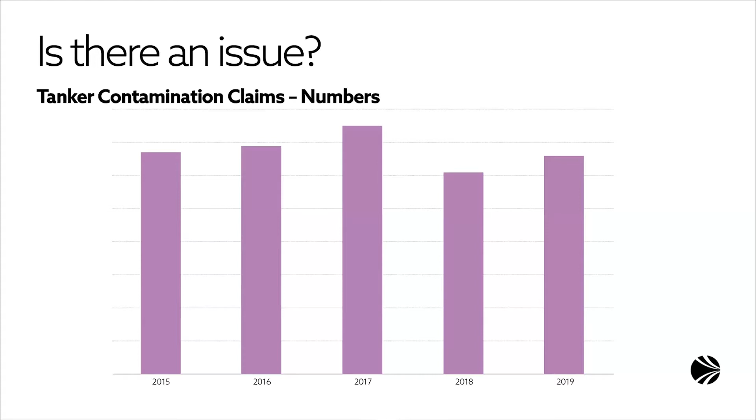And from a loss prevention perspective, this is a little bit disappointing, as it appears to show that we don't seem to be learning from the mistakes that we're making, and seem to be struggling a little bit to get on top of this type of claim. Over to you, Andy. Yeah, thanks, Andy.

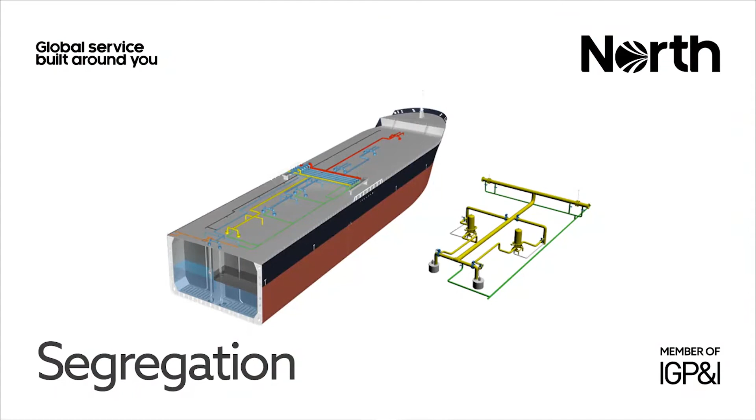And there's been quite a lot of talk and discussion internally within the club on liquid cargo contamination claims and the causes. And the causes that we are going to look at today are not exhaustive by any means, but they are the ones that we see commonly. And there is some good news. Some of them are relatively simple to fix. So the first topic that we are going to talk about is contamination arising from segregation.

I'm now going to throw the ball in Ivan's court. Ivan, in your experience, do you see a lot of contamination claims resulting from segregation? And if you do, do you often get involved in these types of claims? Yeah, thanks, Andy. Unfortunately, this type of cargo claim was one of the biggest I have dealt with during my career with Brookes Bell.

And I'm sure our audience may be well aware of the term double valve segregation. But for completeness, I will just mention what this means in technical terms. This is where two valves work together to provide segregation during all stages of the cargo carriage. This is during the loading, during the voyage, and during the discharging, including the final stripping.

Particularly, double valve segregation should be ensured during the stripping with the use of automated unloading systems, stripping pumps, and cargo eductors. Double valve segregation can also be achieved by positive segregation, such as the use of blind spectacle flanges and, of course, pressure testing of this arrangement. The integrity of the valves is not always tested or planned, in my experience, and the periodic cargo line pressure testing is different from the cargo valve integrity testing.

A valve's integrity should be verified separately from the other valve in the pair, because if both valves are tested together in the closed position, some leakage or passing of one of the valves may remain undetected, and this will compromise the double valve segregation arrangement. We should bear in mind segregation between cargoes may also require the vapour or IG lines to be isolated as well.

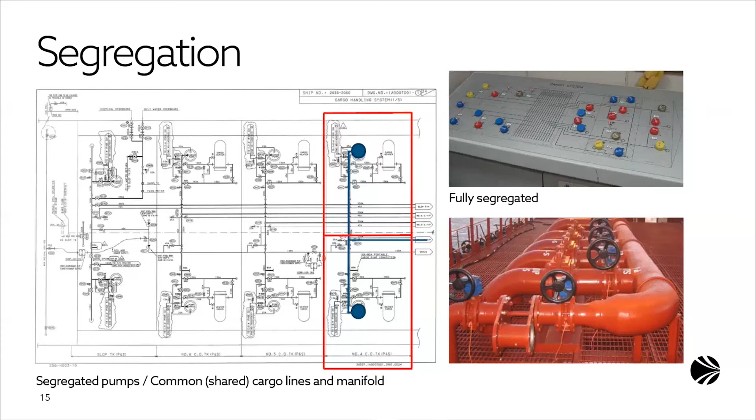The next cause of contamination is relatively brief. We have seen contamination claims on vessels with hydraulic deep well pumps. Now, as you all know, with a deep well pump, or a Framo pump in this case, a large portion of the actual pump is within the cargo tank. So Ivan, can you briefly explain how hydraulic oil from pumps could contaminate the cargo?

Yeah, thanks, Andy. Well, with deep well pumps, the segregation between the hydraulic oil and the cargo in the tank is limited to 2 seals only, and just a cofferdam between these 2 seals. So when both seals fail, hydraulic oil may contaminate the cargo, and the cause for that can obviously be poor, inadequate, or insufficient maintenance, but it can also be the cargo itself. Just for example, sulfuric acid will cause increased wear of pump seals.

So that means it is important to keep an eye on these seals all the time, and also be particularly aware if you've got a cargo like sulfuric acid that could be really detrimental for these seals. Yeah, and there is a way to monitor this, and I think everybody may be familiar with the term purging as a way of preventive maintenance. So when purging is done according to the manufacturer's instructions and records are kept accordingly, a trend analysis of the purging results can then be done. And this is quite important when it comes to deep well cargo pumps.

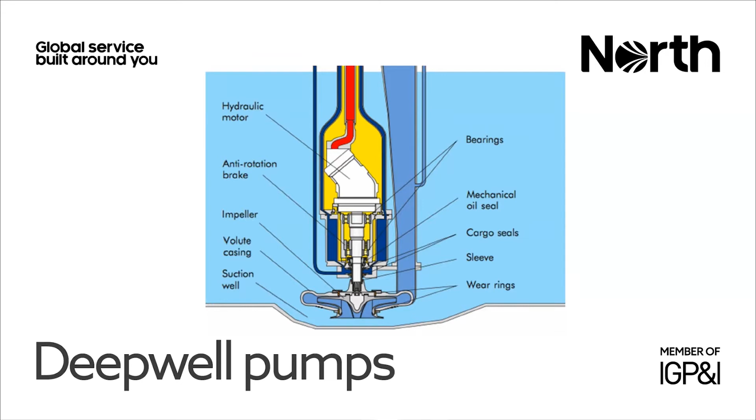Thanks, Andy. Now, we all know the tank condition can be a key contributor to contamination, and we've seen our fair share of these in the past. Ivan, perhaps you could explain a little bit about the different types of tank coatings and how they behave differently. Yeah, thanks, Andy. Well, the cargo tank coatings, they just evolve continuously, and for these reasons, we have employed coating specialists who are able to deal with cargo tank coating as well as hull coatings.

And as the table here in the slide shows, certain coating is more suitable for specific products than other types of coating. It is quite important for the crew to be really familiar with the cargo resistant parameters of the coating. For example, if a vessel is loaded with methanol, there are a limited number of days when this cargo can be stored in epoxy coated cargo tanks, and also there is a need for the coating to cure before more aggressive cargoes are to be loaded.

So as it is also noted in the slide, the coating may absorb moisture, cargo, and also can retain this for a certain period of time, while this is not the case with stainless steel tanks. So the stainless steel tanks may be constructed of solid stainless steel or with a few millimeters of stainless steel cladding, and they can carry very aggressive cargo such as acids.

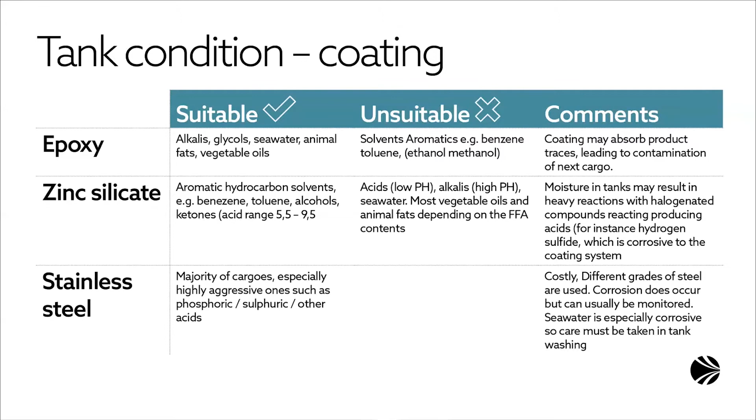For this type of tanks, roughness and passivation levels are some of the parameters that are to be monitored. Some other issues with the stainless steel cargo tanks that come to mind is the discoloration from fluoride vapors, for example, or the so-called elephant skin. Okay, thanks very much, Ivan.

Just moving on to the next slide, and the horror show photos that LP departments across all of the clubs are becoming quite famous for. Of course, these are very good examples of very bad coating conditions. Ivan, what do you make of these images? Yeah, these are quite interesting photos. To me, this suggests a certain level of failure to inspect and maintain the tanks.

Good tank coating allows a bigger variety of cargoes to be carried, and everybody knows that. A failed coating is unlikely to affect the quality of crude oil, for example. However, this may not be the case when we talk about clean petroleum products and chemical materials. Coating may retain previous cargoes and moisture, as we already mentioned, and periodic inspections in this respect, record keeping, raising the awareness about the cargo to be carried is again a proactive approach in preventing potential contamination claims.

Yeah, absolutely. Thanks, Ivan. I think another key loss prevention message here is to take every opportunity to enter a tank in order to inspect the condition and form an accurate report of the inspection. You know, in these pictures, the damage we see didn't happen overnight. So good practice suggests that we keep a rolling record of tank inspections, showing the condition of the cargo tanks. Quite often we see tank inspection reports that say just good, good, good, and then all of a sudden it looks like this.

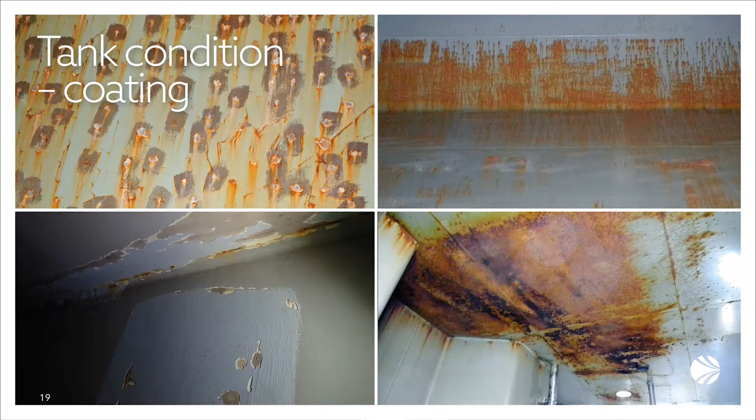So this includes considering whether the cargo can be downgraded instead of a distressed cargo salvage sale, whether there's any way to blend or reprocess the cargo to bring it back on spec, or at least for less of a downgrade to be made. Things to try to mitigate the value of the cargo. So in this respect, we often work very closely with cargo scientists, such as those from Brookes Bell, as a lot of this is all very, very scientific.

Okay, good stuff. Thanks, Ben. Just moving on to the next slide, and on to tank cleaning. We see plenty of this type of claim coming through to loss prevention. Ivan, what are your thoughts on how we can improve cleaning?

Well, with respect to improving the cleaning, the industry has already developed over the years quite a good knowledge database to assist the vessel operators and crew in this respect. Online assistance and various literatures are available, such as the Dr. Verwey Guide, Milbros, Chemsurf, the major oil companies such as Shell, BP, and others. They have developed their own tank cleaning matrices. Another area is the Energy Institute, Intertanko. They continuously update their guidelines as well for tank cleaning of product and chemical cargoes.

We all know that tank cleaning can be quite a time and resource consuming activity, and unfortunately there are no shortcuts for this. It is good not to overdo it, but of course it is not good when it proves to have been insufficient, and then we have a claim to defend. What about tank cleaning machines, Ivan? Can you share your thoughts on them and maybe comment on what the important factors are with regards to these machines?

Well, yeah, the tank cleaning has become quite complex, particularly with the use of cleaning agents and liquid cargoes, not just oil product, but chemicals and vegetable oils. They will require different cleaning approach and medium. What I can say is just know your tank cleaning machines, whether they are portable or fixed, single or with double nozzle, whether they are programmable or not, and how they can be programmed. Nowadays, there are machines that are designed to do the MARPOL Annex 2 pre-washing cycle at a completely different pitch and speed. So basically, pre-washing can be done in 5 to 10 minutes.

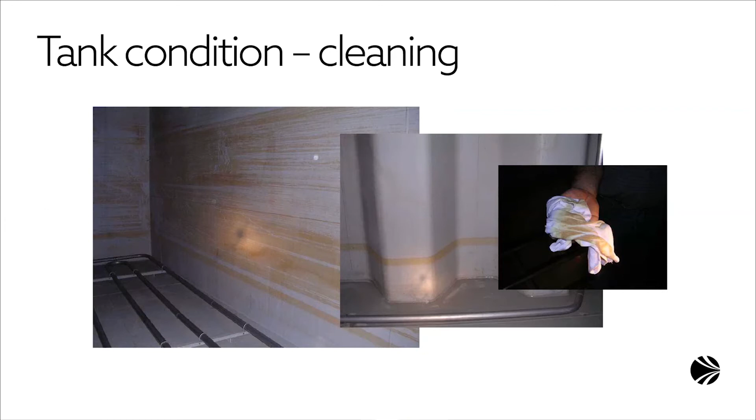Sure, thanks. Okay, moving on to the inspection of tanks then. We see a lot of claims come across the desk saying that tanks are clean, when in reality they're just not. Ivan, what have you got to say about the sort of testing done to confirm that a tank is clean, rather than just looking at it and saying it's clean? Are you involved in this? Any problems in this area?

Well, yes. The tank inspection regime will depend quite a lot on the cargo to be loaded. For example, crude oils and dirty petroleum cargoes do not usually need any tank entry, and simple tank draining may be sufficient. However, some clean petroleum products also may not need tank entry, but others, sensitive cargoes, will most likely require tank entry to verify that the cleanliness and readiness of the tanks, pumps, and also cargo lines

is okay. Whether wall wash test or ultraviolet spectroscopy analysis is used or should be used, as long as the crew has done due diligence to wash and prove the readiness of the tank, I just do not see what else they could possibly do. A tank entry for inspection must be supported by a proper enclosed space entry procedure, of course, because no surveyor will enter a tank without this being followed.

If a tank is not ready for entry, then the only way to inspect is from the deck level, and this is not always sufficient to prove the tank readiness. In this respect, the crew must be ready with the tank entry to facilitate the inspector in port. Let's not forget the inerting. If inerting is required prior to loading, a tank entry can be done at anchorage if the surveyor can attend.

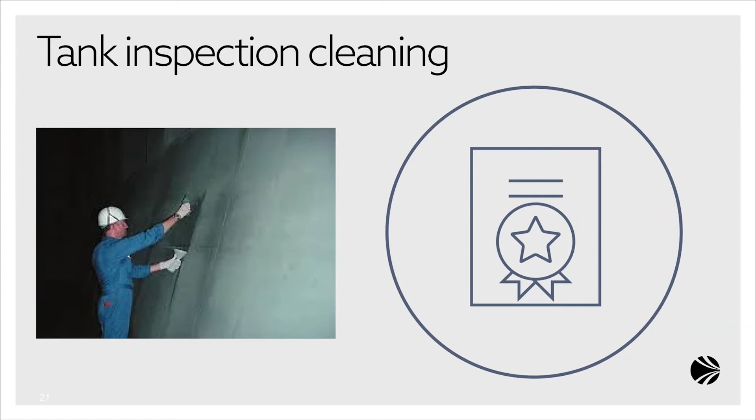Thanks, guys. Some interesting discussions. So essentially, we've looked at segregation, the contamination arising from segregation. We've looked at the contamination arising from hydraulic oil leaking out of the deep well pump, and now we've looked at tank cleaning.

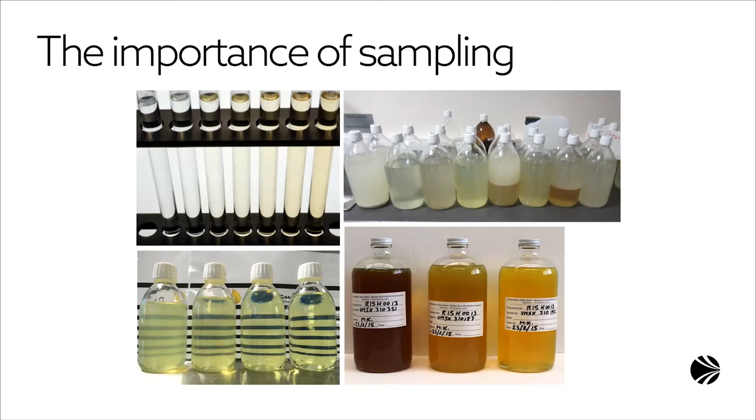And one more thing. You clearly said that you go on board to support the crew and assist the crew and not do the job for them. Is this something that you're seeing more of? I mean, crew depending on the surveyor and asking you to lead the way. Well, I have to say that it is getting better and better. Record keeping is getting better, taking samples is getting better, labeling is getting better, and this is all good for my job. That's great. Fantastic news then.

And Ben, when it comes to the use of independent surveyors, their use must be really very positive when handling claims. Any thoughts? Yes, Andy. I think very often when a problem arises, there is a lot of pressure on the crew. An experienced local surveyor and correspondent can assist greatly in speaking the local language, providing support for the crew. Also, the surveyor may have local knowledge of the claims in that particular port. For example, whether and what common problems there are there.

They might have just done a survey last week, with the same problem. So they might have local expertise, and that can help to assist and guide the crew in the investigation and the evidence preservation. Also, independent surveyors' findings are less likely to be criticized by the opponents.

Yeah, thanks, Ben. I remember from my sailing days how important it is to have an experienced local surveyor at hand, as they can be of tremendous help. Thanks very much. Okay, let's now have a quick look at some of the sampling points that we've been referring to in the last few slides: shore tank sampling point, shoreline, manifold, and then the ship's tank itself. Ivan, over to you. Thanks, Andy.

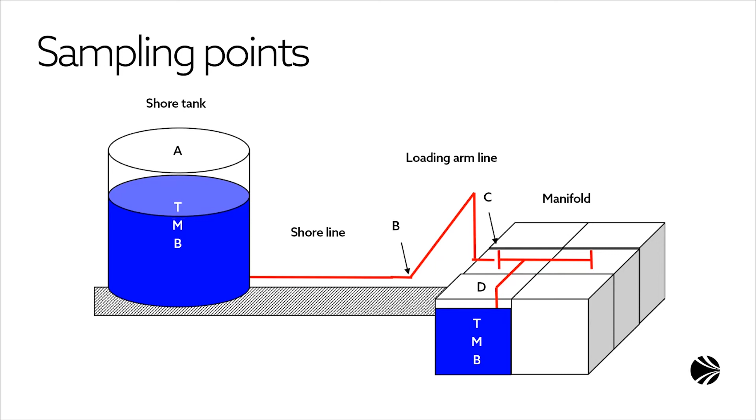Yeah, okay, thanks very much, Ivan. Ben, I know that in terms of shore samples, you had something that you wanted to discuss on this and the access to shore tanks in particular. Yeah, we see a lot of resistance from a lot of terminals to allow shoreside sampling, or where there's an issue, then you want to send somebody ashore. The terminal will give all sorts of different reasons.

Nowadays, it's normally COVID, no access because of COVID. But even before COVID, we were seeing excuses coming from the terminal. So if there is a problem, let us know. We try and help to see whether we can get access or not. Yeah, okay, I think that's an important point there. If members are having difficulties getting access, get in touch with us as quickly as possible.

Okay, moving on then to the manifold sample. We all know the importance of the manifold sample as the location where responsibility passes to the vessel. So it's a very important location to take a set of samples and set aside for future reference. Ben, I think you wanted to touch on this as well. Yeah, if possible, the vessel should consider the proposed loading plan and decide how many sets of manifold samples are needed. Ideally, the vessel should take one set of manifold samples each time there's a changeover in shore tank or stoppage or something that might affect the source of the cargo.

These should be properly labeled and retained. If you've got the right sample from the manifold, you know if the cargo that's come on board is already contaminated on board or not. And that can be a game changer in contamination claims. If the vessel expects this to be overwhelming for the crew, for example, there are too many grades of different cargoes or too many changeovers expected, then the owners may wish to consider engaging third-party surveyors to help the crew. Yeah, that's a good point.

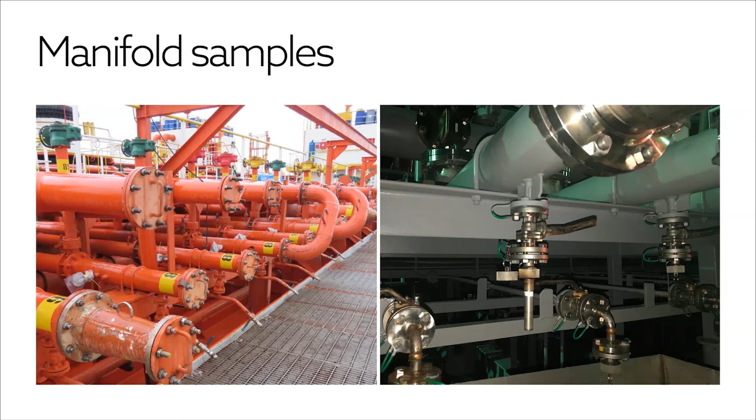Ben, what actually do you guys do to help resolve contamination claims? I think especially for manifold samples, if they show that the cargo came on board contaminated, then it will assist to get the charterers on the owner's side to put commercial pressure on the shipper to help to mitigate the situation. Because the shipper has got a lot more control, and sometimes they are able to discharge the contaminated cargo ashore, reprocess it at a much lower cost and things like that. So the exposure for the claims is a lot lower. Okay, cheers. Thanks for that.

Okay, moving on to first foot samples then. I think we all know these are important, but perhaps, Ivan, you can expand on why this is the case. Yeah, well, the first foot sample is important because it should support the readiness of the vessel's cargo tanks and pipelines to receive the cargo. For sensitive cargoes, the first foot sample should also be drawn ideally together with a series of manifold samples during the loading of the first foot cargo itself.

These manifold samples don't need to be retained if all is okay with the first foot sample, but let's think about what happens if the first foot is found to be out of specification, and how can we prove whether this was the ship or the shore. So irrespective of the fact that the first foot or the first manifold sample may have been within specification, the potential for the presence of a slug of contaminant from the shore during this period of time cannot be ruled out.

One issue I would like to mention is the refusal to witness or participate in the ship sampling operation by terminals or cargo surveyors. They should not discourage the crew from doing basically their job. I would recommend just officially inviting all relevant parties to participate in the sampling activity, describe what samples the crew intends to draw, and maintain a detailed statement of facts logging any refusal on behalf of the terminal or the cargo surveyor to witness or participate in the sampling. We should not forget that they may not have instructions for that.

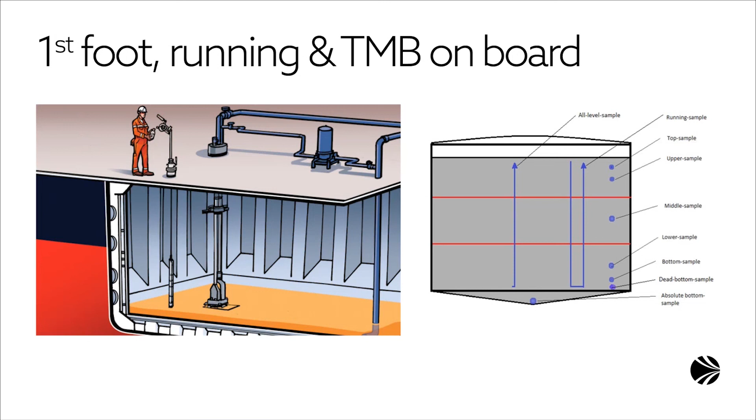Thanks, guys. Interesting discussions. Before we move on to the Q&A session, we do have one last slide on storage. During the pandemic in 2020, we received several inquiries where members were asking about use of their vessels as storage tankers. Ben, would you like to provide a quick summary of our advice as a P&I club when it comes to prolonged storage when vessels are used as storage tankers?

Yes, Andy. I think we all know that every time the price of a commodity drops substantially, or there's a possibility that the price of the commodity will rise in the near future, someone somewhere will want to make money off it. For example, by storing the cargo and making money when the price goes up. So this is often known as the contango trade. If members wish to safely use their vessel to store cargo, the key point is to understand whether such storage is contemplated under the contract of carriage.

However, floating storage, especially long storage, certainly does bring with it some challenges and often many complications, let alone the increased exposure to the owner when the prolonged storage involves sensitive, high value and high impact cargoes such as jet fuel. There are a lot of protective clauses out there, and this is all contemplated before fixing a voyage when you're going to store the cargo.

It becomes more of an issue when the vessel is already loaded with the cargo and then asked to store the cargo on board for a prolonged period. This is when the problem starts, because if you were to do that, then there's a big risk of deviation under the contract of carriage. And that contract of carriage will not, in that case, contain the protective clauses. Besides the legal implications of deviation, prolonged storage also increases the risk of cargo deterioration, especially for cargoes like jet. Andy, are you able to elaborate more on this?